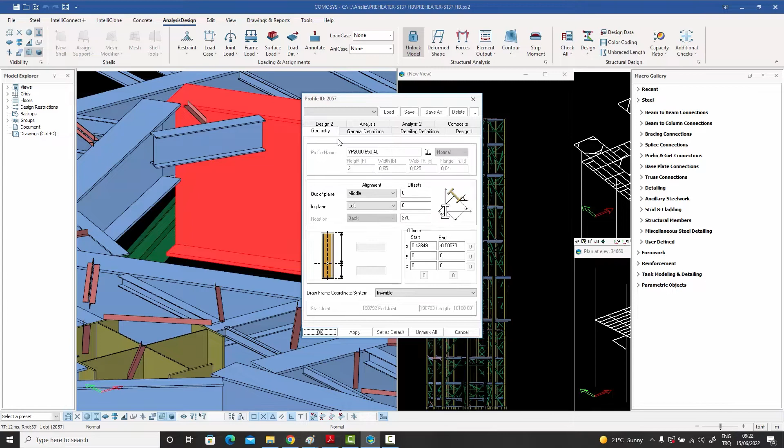But a beam as high as this, say a 2-meter high beam, the moment is going to dominate as far as the section design is concerned. That's why we have this, or some deflection criteria might be dominating. It depends on the span and all, but unless it's a very short beam...

Where the shear dominates, more often than not, perhaps more than 90% of the cases, more than 95% of the cases, you will have reasonably small shear loads at the ends. If you were to do a design according to those shear loads, you will get a very small number of bolts, maybe just 3 or 4 bolts to connect this huge beam. But this is also a practice which is avoided in steel structures. You would typically want this beam to be like maybe about half full of bolts or something like that. So these are the contradictions which we face, that if we just convert the forces from the analysis into this beam and design directly according to those forces, you end up with something which you don't like.

So this is something I just wanted to mention at the beginning. But what I really wanted to say was that what you want to do is transfer your forces from your load combinations into the beam first, and then look at those forces and see if they're extremely low.

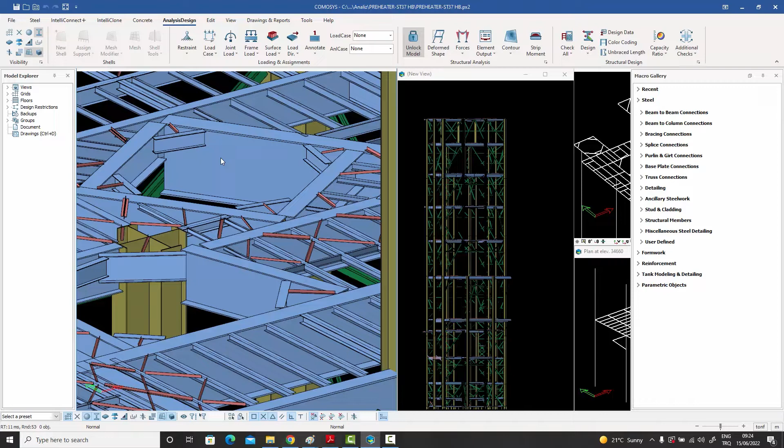I mean, they could be as low as 5% or 0.05 of the shear capacity, 5% of the shear capacity. So in those cases, what you want is to increase that number to some sort of a minimum, say of the order of half the capacity, or 0.4 of the capacity or something like that. And you can do those kinds of things in Comosys.

I will try to show you the steps through which we go and how the macros will behave accordingly. Now, the first thing I want to explain is that if you double click on a beam and go to the detailing definitions tab, you will see two variables: one is called the shear capacity ratio, and one is called the axial capacity ratio. By default, they're 0.

Unless you fill those numbers up with a special command, which I will show in a second. But whatever - if I were to write 0.3 over here, what that would mean is that when I went through all the load combinations and looked at the V22 and V33 variables, and then converted them into the equivalent shear capacity of this member, then the maximum, or in the case of V22 and V33, it would be the square root of the sum of the squares.

Usually the V33 will be very small, V22 will be dominant, maybe 90% or 95% of the load. But in any case, the combined shear forces compared to the shear capacity of this member is just about 0.3 or 30% of the shear capacity of this member.

So let's say if I'm using a fin plate or a beam to beam end plate or a stiffened end plate connection or whatever, I want this member to be designed according to 30% of its shear carrying capacity. Similarly, this beam could have an axial force, and the axial force could be, say, 1 ton.

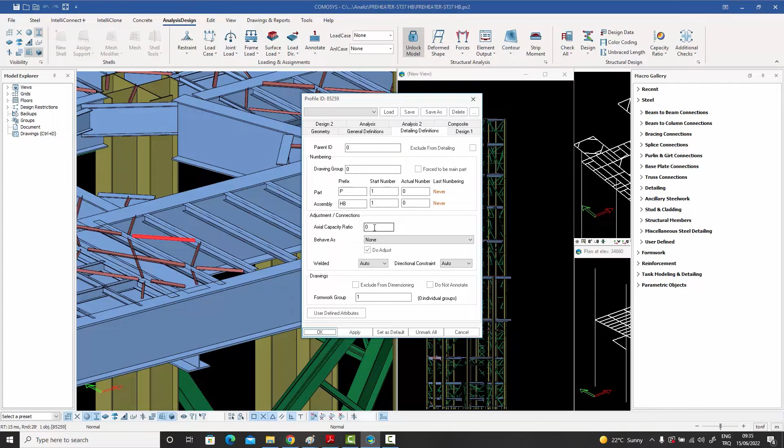Now, if I were to double click on, say, a horizontal bracing and go to the same detailing definitions tab, this time, instead of two numbers, one for shear ratio and one for axial ratio, we have only one number called the axial capacity ratio, because those members are primarily there to take axial loads. So once again, this number could range from 0 to 1, 1 being the full capacity and 0 being no load at all.

And typically these numbers will be, if you look at the forces, of the order of 0.3 or 0.4 or something like that. So this is the number which will need to be filled up if you were to unlock the model.

Then before unlocking the model, we need to do something to automatically fill this number up by going through all the load combinations and finding the maxima and putting a number in there so that Comosys can use that number even if the model is unlocked.

And similarly, if we were to go to the vertical bracings, once again we only have the axial capacity ratio because this element is governed by the axial capacity. And once again, the default is 0, but it needs to be a number between 0 and 1. It can be a number greater than 1 as well if you want.

But primarily what it would need to do is go through all the load combinations, find the maximum axial force in those load combinations, compare that to the area of this member and the load carrying capacity of this member, and the material of this member, and then find an axial capacity ratio which will govern the design.

Now, the way you tell Comosys to fill up these numbers - let's go back to the beam example, and we had talked about this shear capacity ratio, which has to do with your V2 forces primarily, and your axial capacity force ratios. Our purpose is to unlock the model and allow the detailer to work freely, so before we do that, we need to transfer the forces into these numbers.

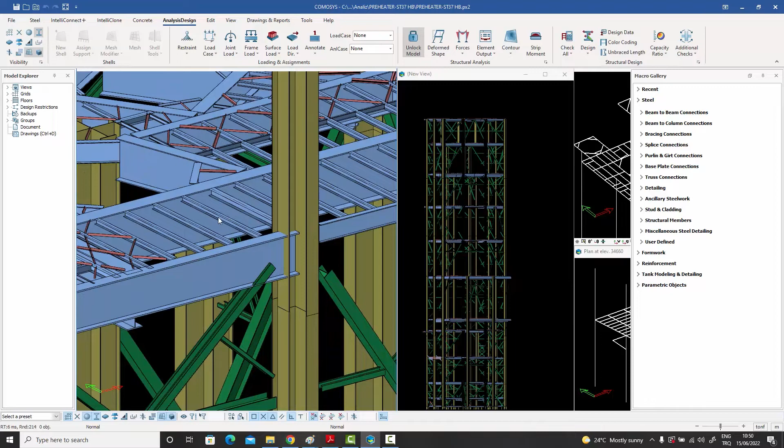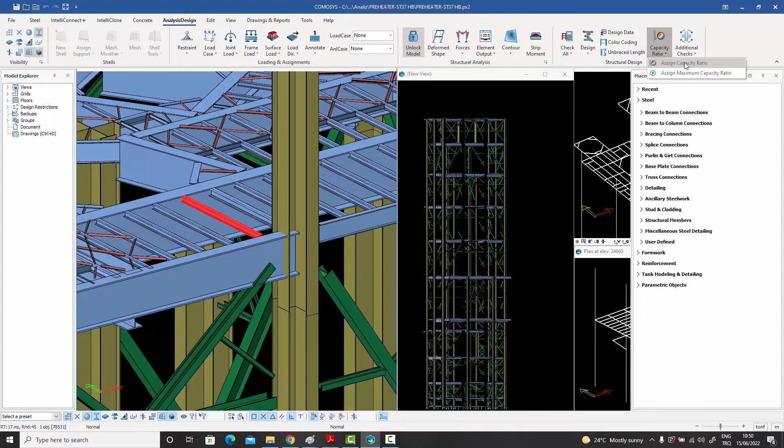The way we do it is we can select the whole building and press a button, but I'll do it one at a time. Let me select this beam. What you do is open this menu, there are two commands over there, and you press this one, assign capacity ratio. This is the command which will tell the program to go through all the load combos, find the maxima, and assign it to that number. Let me press that, and it says computed capacity ratios for each element is set.

So it's basically set the numbers for this beam. Let me double click on the beam again now, and this time you see that you got two numbers. Previously these were both 0. Now the shear capacity ratio has been set to 0.5, and the axial capacity ratio has been set to 0.078. This is actually not very small - it can be significant because we don't really want large axial forces in our beams. But sometimes you do have axial forces in the beams, and these can modify your choice of which particular connection to use.

But in any case, it's got two numbers in there. Now I can go ahead and unlock the model, for example, and connect this beam with these forces.

Now, this command is a bit customizable. So if you were to open this over here and press the shift key, that'll, as you know in Comosys, by pressing the shift key we can get to the settings of the command. This little dialog box opens up, and as you can see there's a general tab, which is not really important.

But these two tabs are important because the elements are generally broadly divided into two categories - they can be axial members or they can be shear members. Axial members are basically your vertical bracing, your horizontal bracing, or all types of trusses, etc. As far as shear members are concerned, these are members in which your shear forces dominate the design - these are beams and purlins and girts in which there are end releases, so they're connected as simply supported members. As I said in the beginning, as far as moment connections are concerned, they're done according to capacity. So members are basically divided into either axial members or shear members.

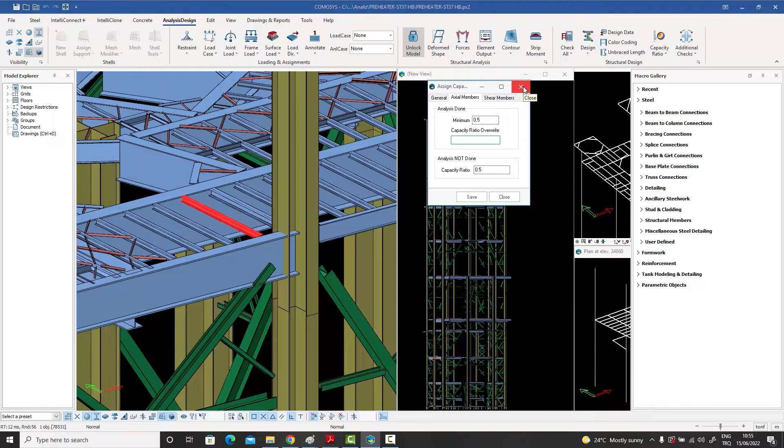So this is a very handy and quick way to unlock the model without really losing anything, and to allow the detailer to continue the detailing with the analysis results saved away in the form of these compact numbers, so that the connections can be designed accordingly.

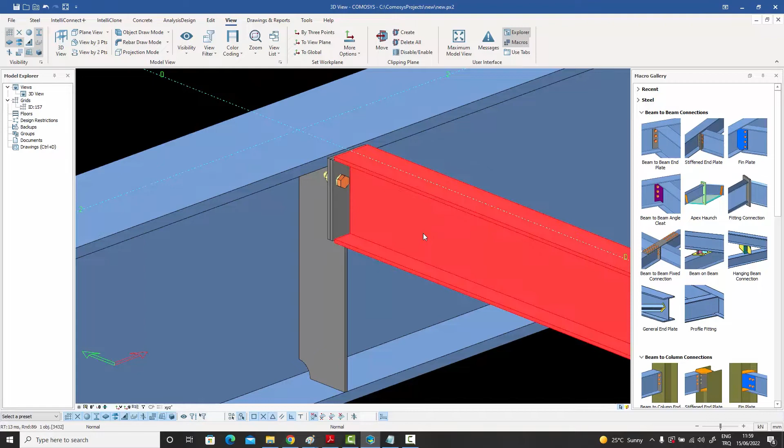Now I want to say a few words about connection design and the basic procedures followed in the background, so that you understand the assumptions and can use it accordingly. As I explained, we have these capacity ratios inside the members, and you can convert your analysis results into these equivalent capacity ratios.

When you actually go ahead and create a connection, so I've created a connection over here, what it does is a preliminary design. That's what needs to be understood. What it is doing is a basic design - it's creating a suggestive connection for you, that in all probability this number of bolts, this thickness of plate, this size of weld will probably work.

What it is not doing is a full detailed code check. It's like a preliminary design - you can think of it like that.

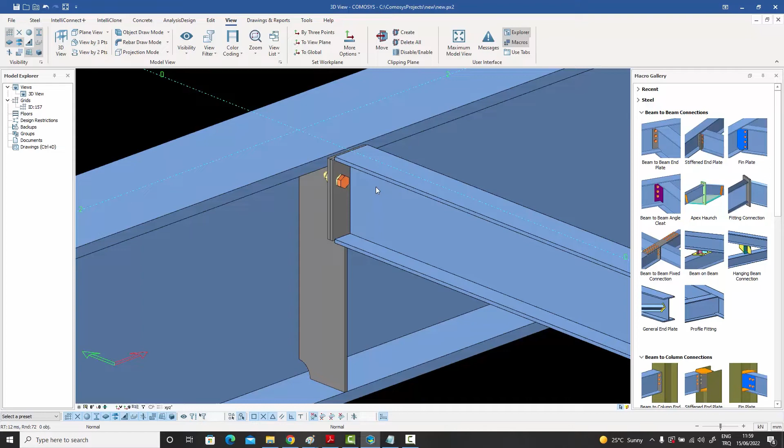After having done that, for example right now I've made this connection, and if I go into the color coding, I can see that this is green. What this green is telling me is that the full design check is also working out.

So I need to explain this - it might be that in the preliminary suggested design by the macro, some detailed design checks might be red. In a lot of cases it'll be green, but sometimes when you apply the macro it's going to come out red.

Why doesn't it always come out green? The reason is that when you apply the macro, what it's basically doing is a preliminary design, not a final design. It's calculating approximately, based on the loads we've provided, a number of bolts, the thickness of plates, and size of welds.

The reason I say approximately is because when you go to the codes, there are a lot of detailed ifs it goes through. So the allowable variables - for example the allowable shear capacity or allowable tensile capacity of a member - might have lots of different conditions, so that in this condition it is this, and in that condition it is this, modified by 10% or 5%.

So in the initial application of the macro, those detailed checks are not done, but approximate preliminary checks are done, and more or less a final connection, we can say, is applied.

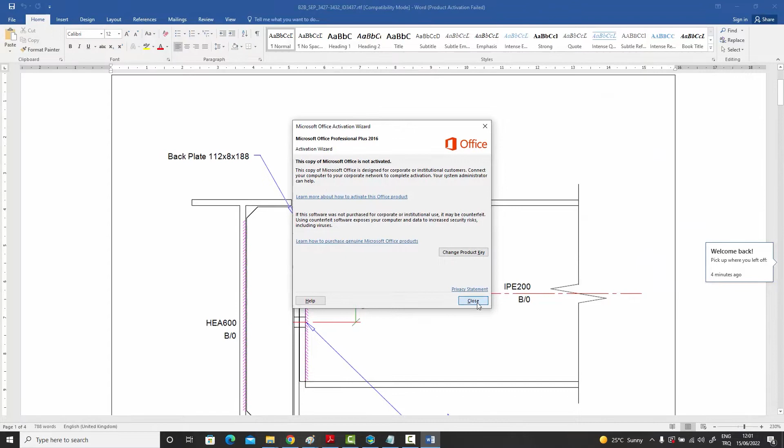But then when you actually go ahead and create your design report, which you can do by pressing M, going to M-enter, going to the macro and saying show me the default connection report - at that point the program actually goes and does all the code related detailed checks.

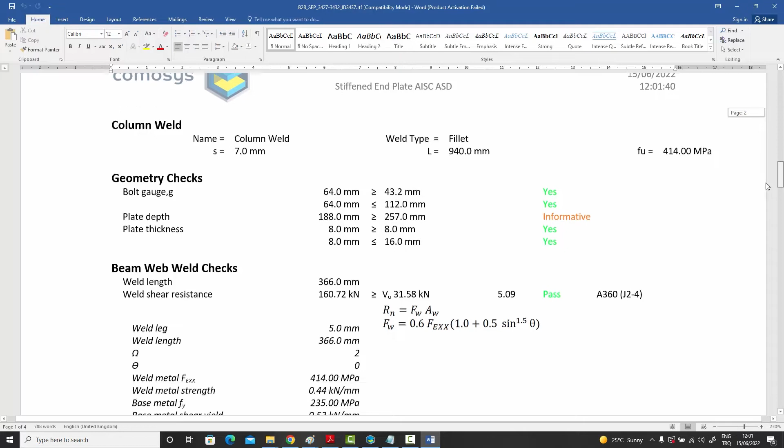And in this report, if the preliminary design was incorrect or insufficient at some point, you will see some things failing. So this is the basic idea of the preliminary design and the final check.

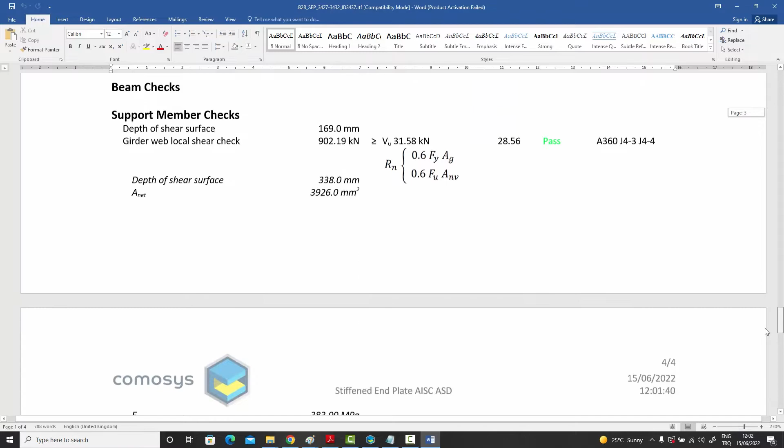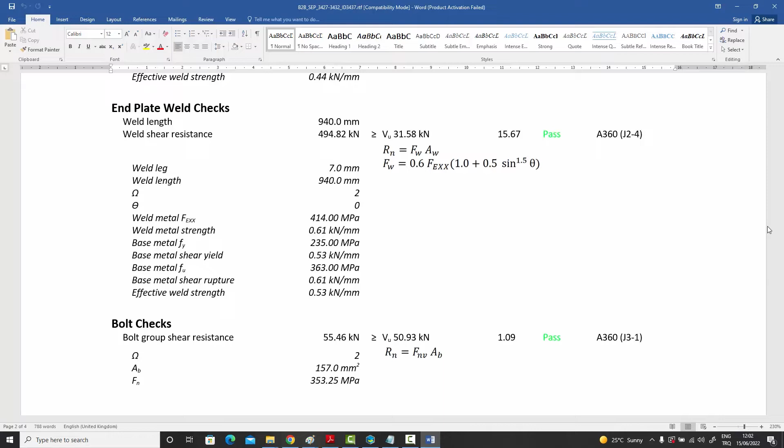What you see in the report is the final, detailed check - and this is what you need to understand. So whenever you apply the macro and see the color coding is red, you have to go inside and find out why it is red, then go back to the macro and make appropriate changes, because the preliminary design does not work 100% of the time.

So now a question would arise - if upon the initial application of the macro it is only doing a preliminary design, then what exactly is it checking, and how is it making the preliminary design if it's not going through all the code checks?

It's only going through a rough estimate - not exactly a rule of thumb, but a rough estimate of what the number of bolts should be, what the thickness of the plate should be, and what the size of the weld should be. What exactly is it doing?

To understand that, let's take this example. This is for a simply connected beam.

It'll just do 2 or 3 major checks. Let's say the load, the shear force on this, is 5 tons. So it's going to just go and check.

It's going to take a rough guideline number for the shear capacity of these bolts. I say rough guideline because when you actually go to the code, it might dictate several conditions - that in this condition you modify it by 10%, increase it, decrease it, or take a different value. But in the preliminary design, it doesn't go through all that. It'll just take a suggested allowable shear value for the bolt and do the basic number of bolts check.

Similarly, for the plates, it's going to do a very simple bearing check. And for the welds, a very simple weld strength check. And if the bolts are in tension, it's going to do a tensile check. So very simple, back of the envelope kind of calculations, what you'd typically do by hand.

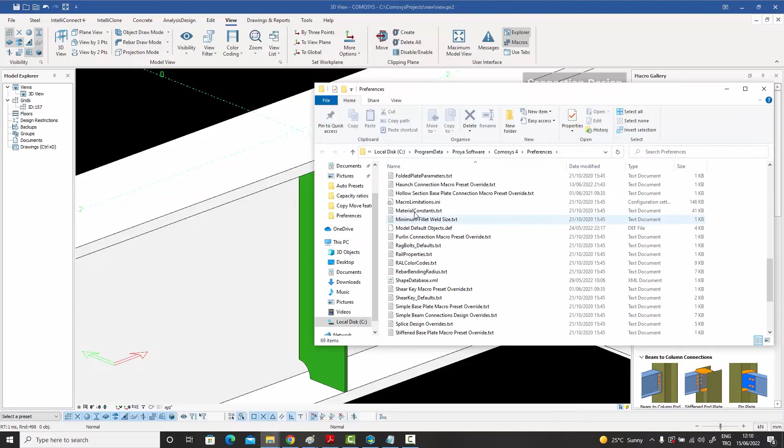This is important - where does this material constants file reside? Let's go to our preferences directory and scroll down to M. We have this file called material constants. If I double click on this and maximize it, you'll see it has a certain format, and the format is actually very simple.

So all these are the headers, these are the columns. You have your code, the name of the material - let's say the name of material is ST37 - and then a design code. Then you have the yield value for that material given in that code, and an ultimate value given in the code. You have values for bending, bearing, punching, the E value, the nu value, the tensile strength, the axial strength. These are all allowable, guideline allowable numbers.

If you actually go to the code, for example if I take this ST37 ASD, it says the allowable shear strength is 70.5, whatever the units are. Now if you go to the code, it might have lots of ifs - it might say in this condition it is 68.7, in this case it is 75, in this case you divide it by gamma, multiply it by that factor, or this and that.

But this is a back of the envelope kind of suggestive calculation, which you can also modify so that you can have slightly over-designed connections in the beginning. So for all these values - most importantly, the allowable tensile strength, allowable axial, allowable shear, allowable slip - this is also for slip critical bolted connections.

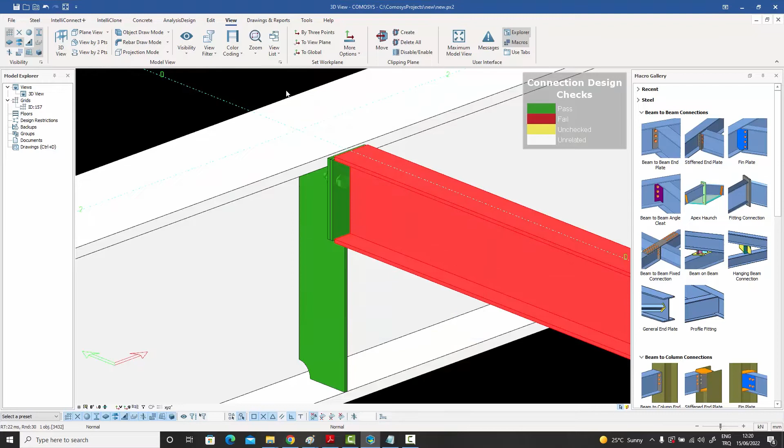Let's go to the material constants file again. In the material constants file, this is the material ST37 of that beam. If you notice, there are 5 lines for this material, one line for each code which is supported. Right now I'm doing this according to the ASD standard, and this file is telling me that the allowable shear is 70.5 newtons per millimeter squared. This is the number.

You can change these numbers. Like I said, you can lower them if you want to, if you want to create a slight over-design or whatever. You can modify these numbers. These are entirely used only for that initial preliminary design. So it is 70.5 newtons per millimeter squared.

Let's just take G to be 10. So this is about 0.7 tons per centimeter squared. And if you remember, the area was 11.2. If I multiply 11.2 by 0.7, for example, it's about 7.8 tons. So the shear capacity of this beam is about 7.8 tons according to this preliminary design.

But beyond that, I'm actually taking only 40% of that shear capacity. So if I multiply 7.84 tons by 0.4, I get something like 3.13. So basically what I'm telling the program is that you roughly take about 3.13 tons of load, and find the number of bolts for that.

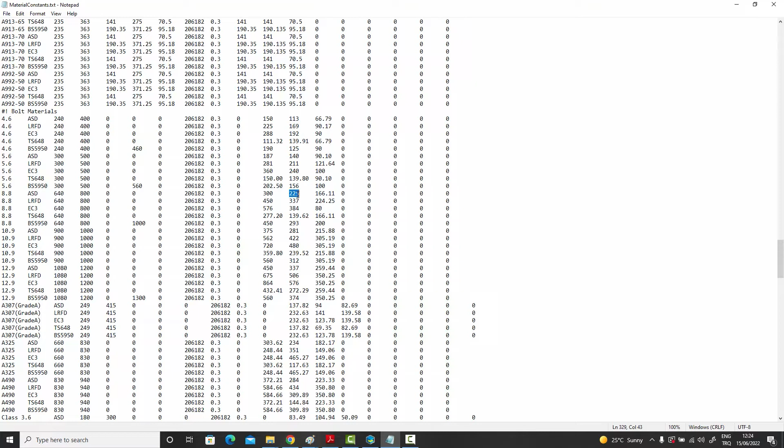And the allowable is about 2.25 tons for each centimeter squared. So 2 multiplied by 2.25, and I know that even a single M16 bolt takes about 4.5 tons according to these numbers. These are just, like I said, preliminary numbers. But a single bolt is taking 4.5 tons, while the total load which I want to take is about 3 tons.

So it's not going to put one bolt, it's going to put one bolt on both sides. So easily, even a single row of bolts will be able to take the 3 tons which are coming to this beam. So the two bolts put together actually have a capacity of taking about 9 tons of load, but the load is only 3 tons.

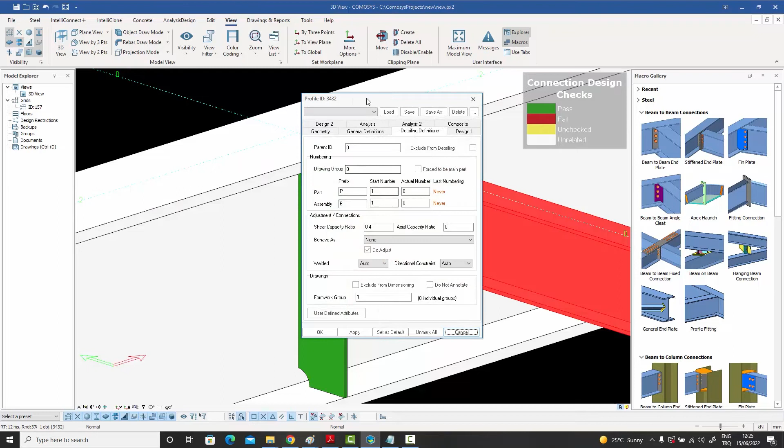Now I'm going to show you something where this preliminary design fails, because this just does a very simple check of dividing the load by the bolt's allowable shear. It doesn't do a block shear check, for example, which can cause other types of failure. It doesn't do that in the preliminary, but it will do that in the final report, and that's where you're going to find out.

So if I double click on this beam and increase this shear capacity ratio to 0.5 - this is a very slight increase as far as the load, our load will probably go from 3 tons to say 4 tons, so it should still be green. But when we do that, we see that the detailed connection turns red. This is telling me that the preliminary design I had done wasn't sufficient and something is wrong.

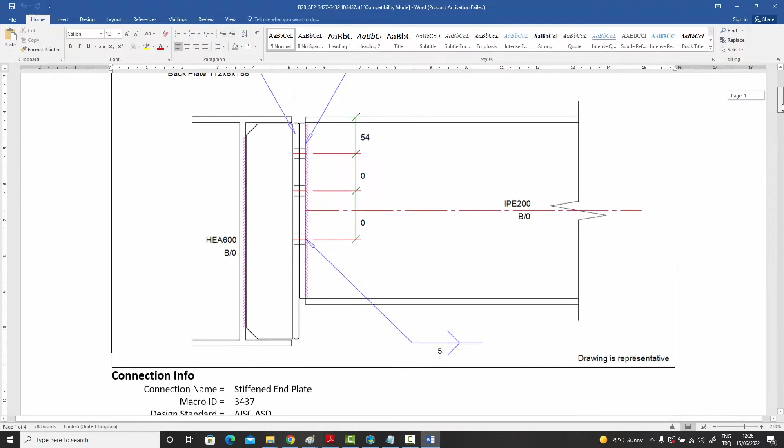So I need to go in and check. I just select any member, type M, right click, go to the macro, go to my connection design report, and open up the report. When it opens, I can scroll down and see exactly what went wrong - there'll be a fail somewhere. Don't bother about the informative ones, they're not structural checks, just giving you information.

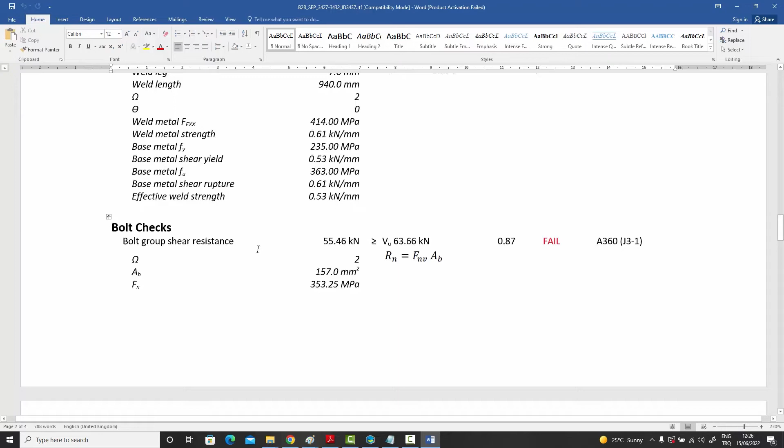Things are passing, but over here, just like I thought, this bolt group shear resistance is failing slightly. Although my bolts can still carry the shear very easily, this group shear resistance check, which was not part of the preliminary design, has caused a problem. If I go further down to see if anything else is failing, the other things seem okay. This usually happens when the loads get concentrated around a single line of bolts.

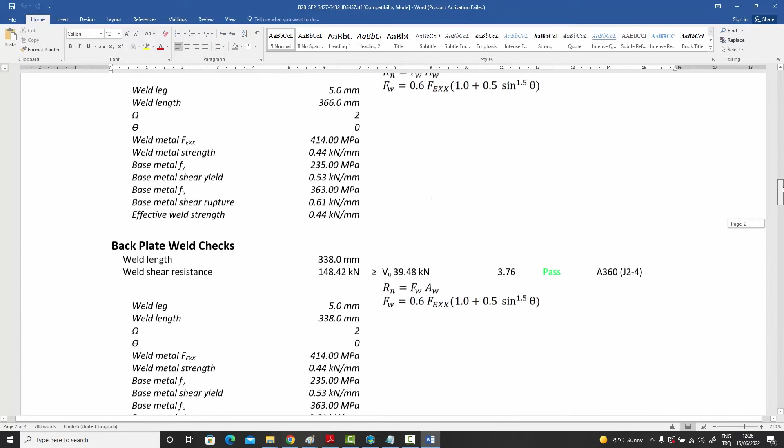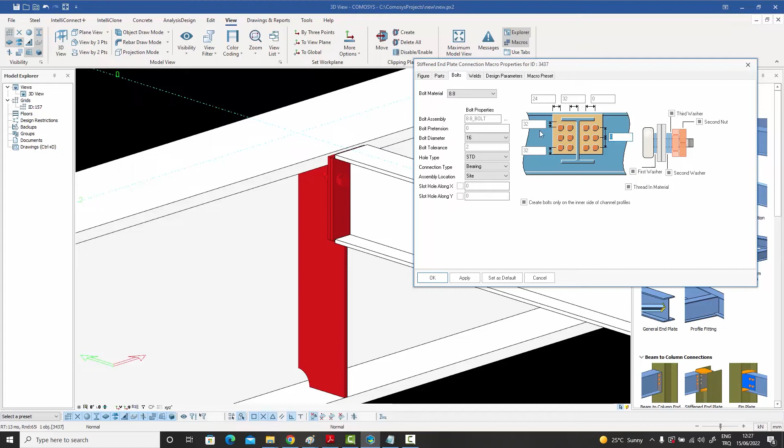The easiest solution is just to increase the number of bolts to 2 rows or 3 rows, and then this check will easily be solvable. So let me close this report. We can go into the macro, and instead of the automatically calculated single row of bolts in the preliminary design, I can make it two rows of bolts, for example.

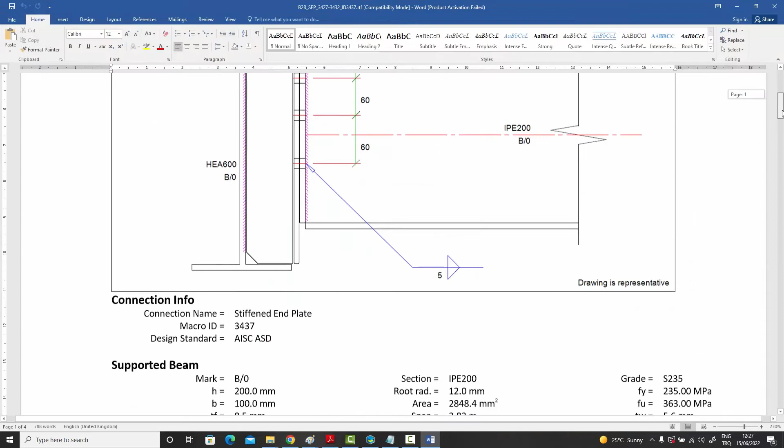When I do that, immediately now my connection turns green. Now I can go back into the report again and open it once more, and see that this time that bolt group check which we just saw failing - yeah, here it is. So this one was failing previously, but now with the modified parameters, this has passed.

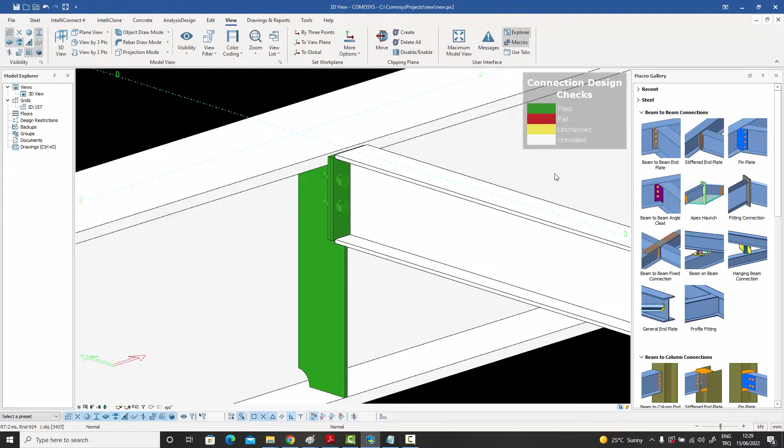So to summarize, I hope I've been able to express why the macros don't turn out green all the time at the very first attempt. Because the first attempt, the first cycle, is basically a preliminary design cycle in which a very simplified design is done based on the material constants file. You can go ahead and modify the numbers in there - you can lower them, for example the allowable bolt shear stresses, let's say 20-30% below the standard values taken.

And what that will help you with is that most of your initial preliminary designs will turn out to be green. But in any case, in the final analysis, once you actually create the report, you can see all the detailed checks done over there.

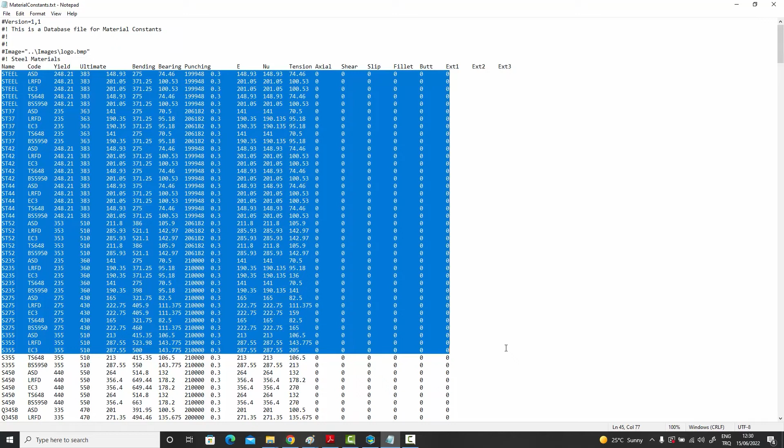So to repeat, it's a two-step process. The first step is merely a preliminary design, based on these numbers in the material constants file. These numbers are close to the numbers suggested by the standards, but not exactly the same, because the standard for the same allowable can have 10 different values, so we don't have the option of putting all those numbers in there. But these are all suggestive allowables - allowable for axial, for shear, for slip, and so on. What this allows Comosys to do is a very quick initial design for you. But once you create the report, then you can see what the actual check for that report is. This two-step process will make you understand how the design of the connection works.

So now let's do a slightly different example. I have this slightly larger beam, and initially I've set it to 0.1 of the shear capacity, and it's green - all the code checks are passing. Let me increase this to 0.2, and it's still passing.

Let me increase that to 0.3, and this time you get a little more bolts, but it's still passing. Let's increase that to 0.5, and it increases the number of bolts according to that load level, and it's still passing. Let's make it 0.6, and that's still the same number of bolts is enough.

Let's make it 0.8, and this time the number increases, but it turns red. So I need to find out what this is telling me. As far as the preliminary design was concerned, I had suggested a few values and they were working fine.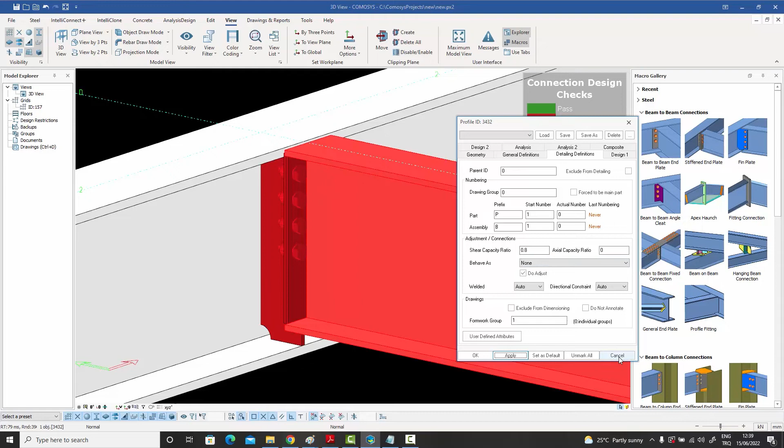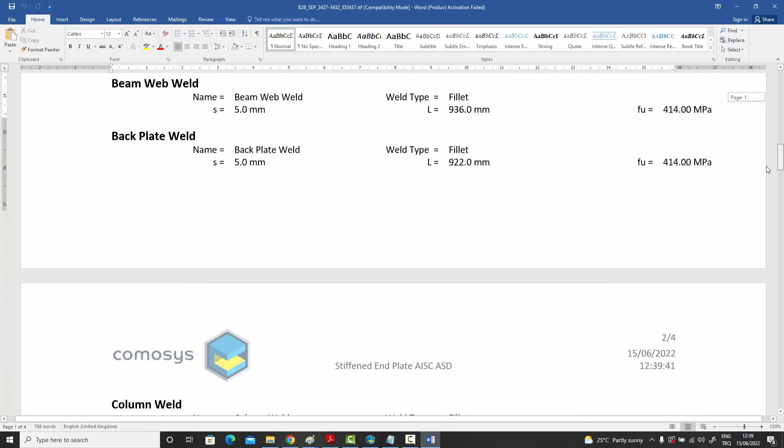But at this load level, some of the detailed code checks are not working out. I can go back into my macro at this stage, go to my connection design reports, and open up the report. If I scroll down, I'll see that generally the bolt checks are passing.

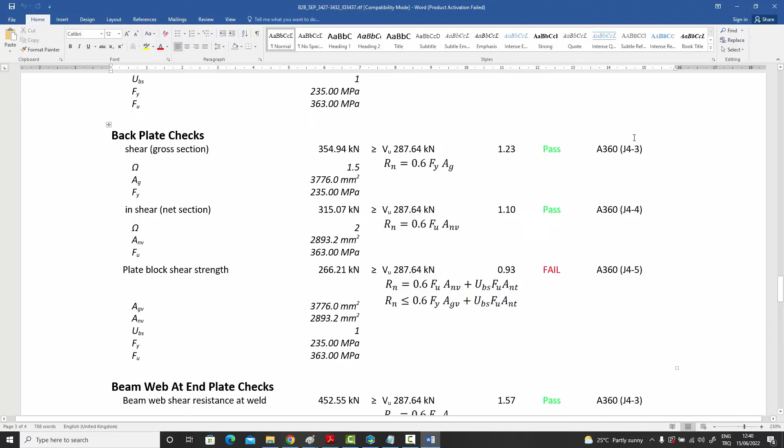But there's a plate block shear, end plate block shear, which is failing. Basically, because in the preliminary design it only checks for the bearing of the plate, that's okay. But this plate block shear related check wasn't done in the preliminary design, and in the detailed design it comes out. So now I need to go inside and change the end plate thicknesses.

Let me go and change the default thicknesses which it used, doing only the preliminary check. If I do that, then once again, even at this level, it turns green. Let me see if I can take it all the way to full capacity. And apparently I can. So with these 6 rows of bolts and the 12mm thickness plate, I can design this connection in this way.

Now there's one final thing I want to talk about, because that can lead to some confusion, and that is that there could be a conflict. If you remember, I said that by changing these numbers, you can modify the preliminary design suggested by the macro. But we also discussed elsewhere that you can create your company presets for the various profile sizes, and automatically apply those presets.

So we had done an example in which I created 3 presets for the fin plate connection, and this is the preset for the IPE 400 one. If you remember, these presets are automatically applied if you have the automatic preset override file, which we had discussed.

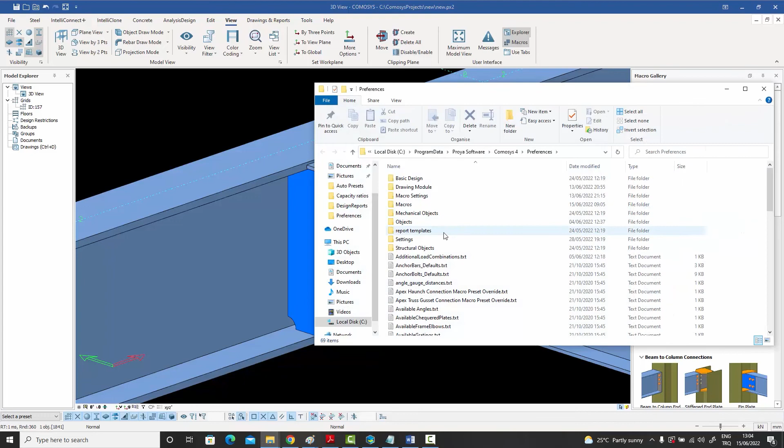So let's go to the fin plate connection macro. Yeah, so in this one we've entered the 300, 200, 400 automatic preset files, the MPR files, which we discussed in another video. That's telling Comosys that whenever you see an IPE 400 section, go to that company preset and apply that preset. So this is what it's going to do by default.

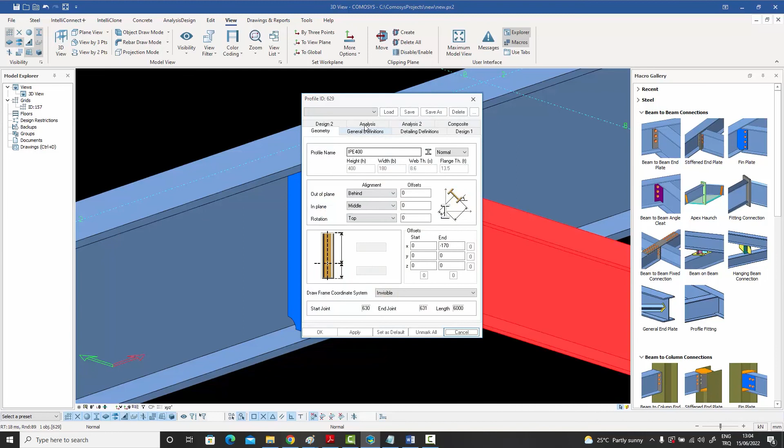Now if you were to double click on this IPE 400 section, go to the detailing definitions tab, and try to modify this shear capacity ratio, right now it is not designing according to this. Right now it's just putting the company presets, because the company wants that whenever you see an IPE 400 profile, this is the way you connect it. So the preliminary suggestive design is kind of turned off right now.

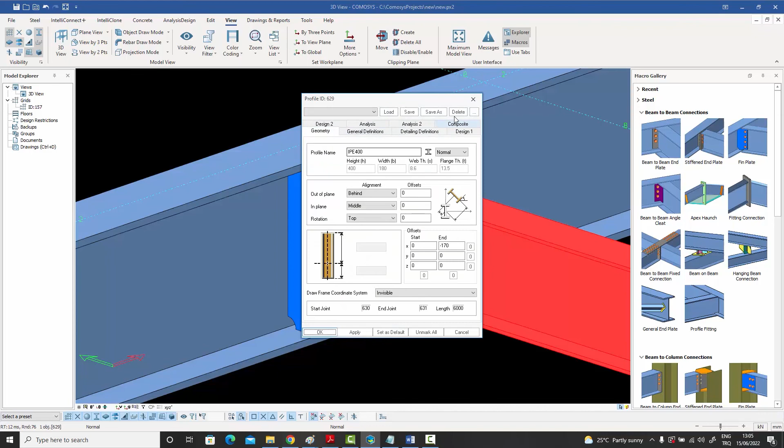So if I were to make this 0.3, nothing's going to happen on the screen, because it's checking the 0.3, but then it's saying, okay, this is an IPE 400 section, I have an IPE 400 preset as well, and the company or automatic presets have also been set up, so I will just use that.

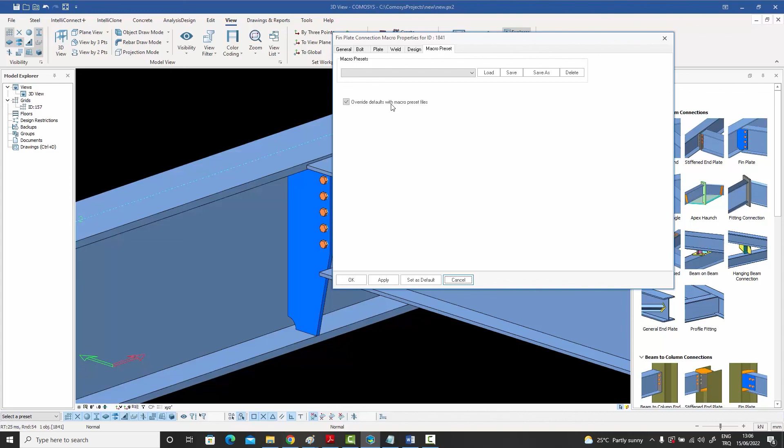So if you wanted to override those company presets for a moment, you would go into your macro, and in the presets tab, turn off this flag, which is 'override defaults with macro preset files.' If I turn this off and say okay, and now if I go in and make a change in the detailing, say bring it back to 0.1, okay, the reason that didn't work is because the macro already has those defaults loaded up.

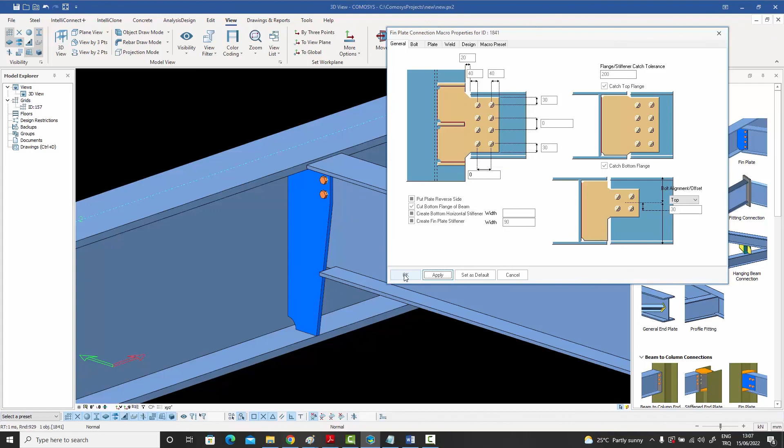So I need to clear those defaults as well. Let me go in and clear those distance-related defaults, like that. Yeah, so now it's actually going in and doing some sort of analysis, and it's modifying - if I increase it further, now it's changing the bolt diameter, and right now it's doing that preliminary design which it does based on the material constants file and the load level.

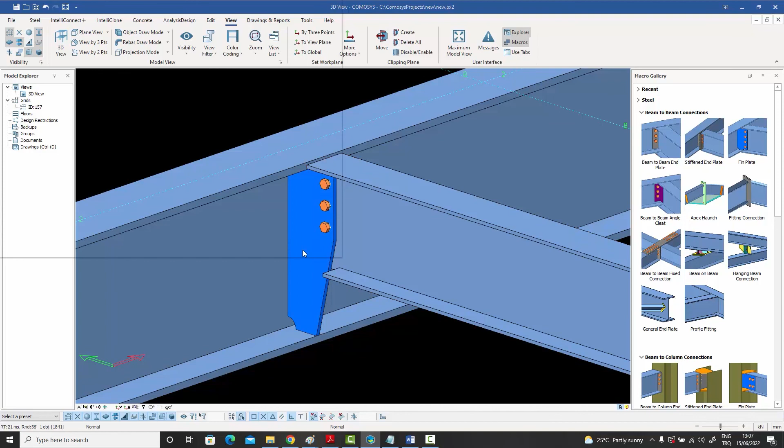But if you have turned on these presets, then what it will do is basically go and look for your automatic presets and try to apply those automatically as your company standards.